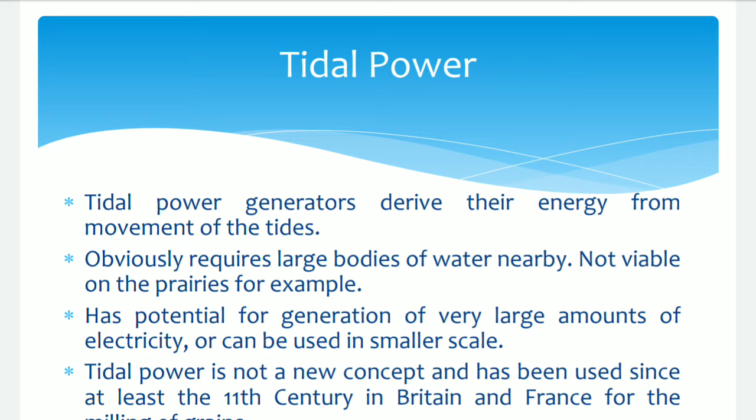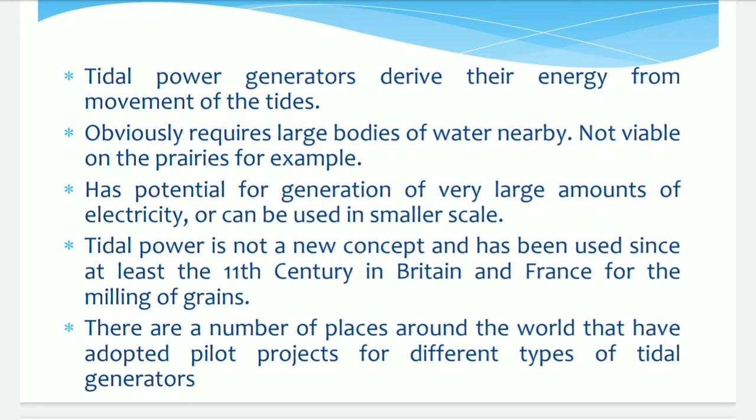Tidal power generators derive their energy from the movement of the tide. Obviously they require large bodies of water nearby, not viable on the prairies, for example. Has potential for generation of very large amounts of electricity or can be used on a smaller scale. Tidal power is not a new concept and has been used since at least the 11th century in Britain and France for the milling of grains. There are a number of places around the world that have adopted pilot projects for different types of tidal generator.

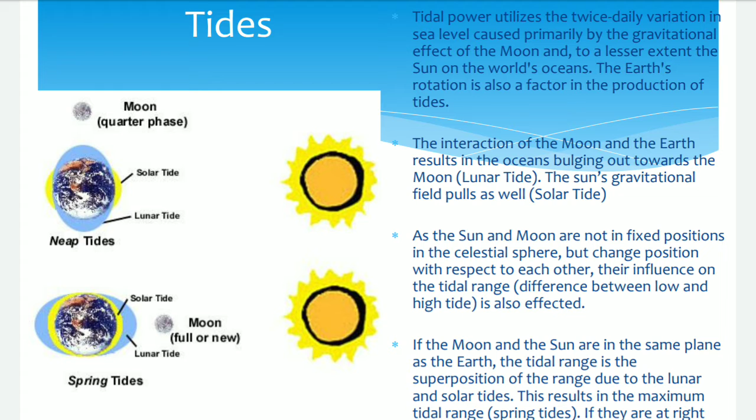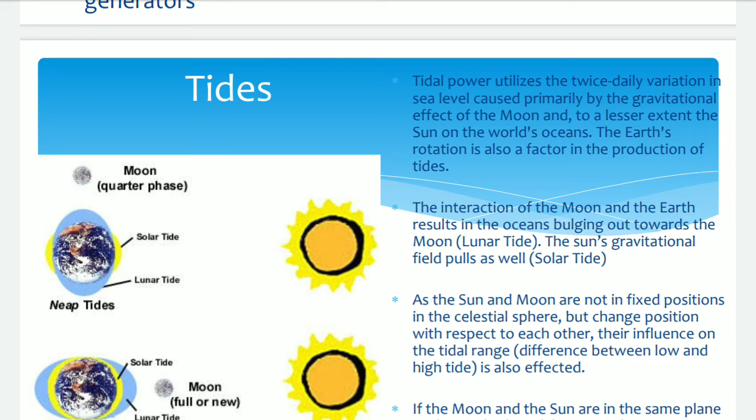Tidal power utilizes the twice daily variation in sea level caused primarily by the gravitational effect of the moon and, to a lesser extent, the sun on the world ocean. The earth's rotation is also a factor in the production of tides. The interaction of the moon and the earth results in the ocean bulging outward: the lunar tide. The sun's gravitational field pulls as well: the solar tide.

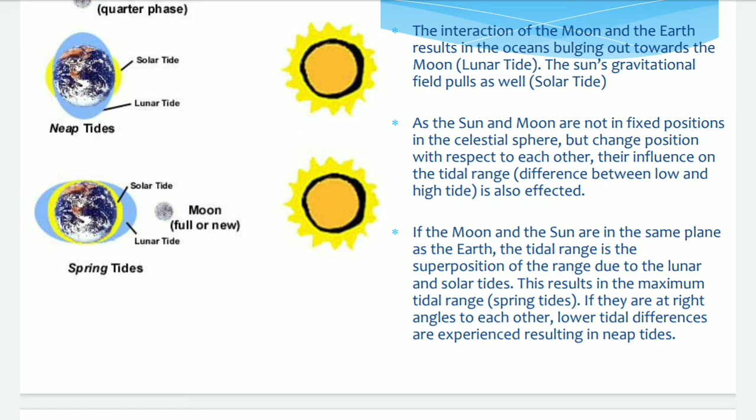As the sun and moon are not in fixed positions in the celestial sphere but change position with respect to each other, their influence on the tidal range, the difference between low and high tide, is also affected. If the moon and the sun are in the same plane as the earth, the tidal range is the superposition of the range due to the lunar and solar tides. This results in the maximum tidal range, spring tide. If they are at right angles to each other, lower tidal differences are experienced, resulting in neap tide.

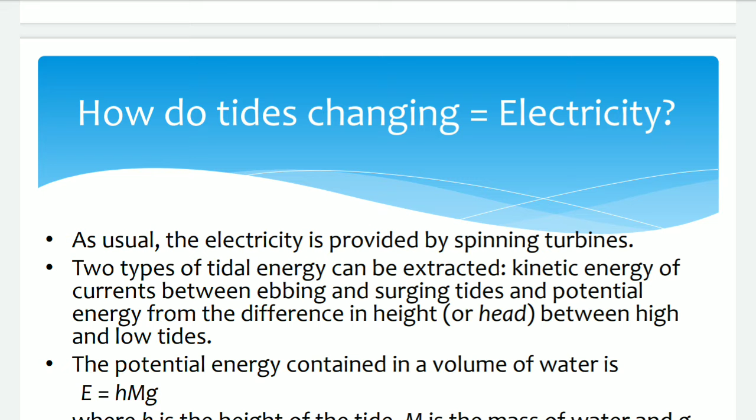Two types of tidal energy can be extracted: kinetic energy of currents between ebbing and surging tides, and potential energy from the difference in height between high tide and low tide. The potential energy contained in a volume of water is mgh, where h is the height of the tide, m is the mass of water, and g is the acceleration due to gravity. Therefore, tidal energy generators must be placed in locations with very high amplitude tides.

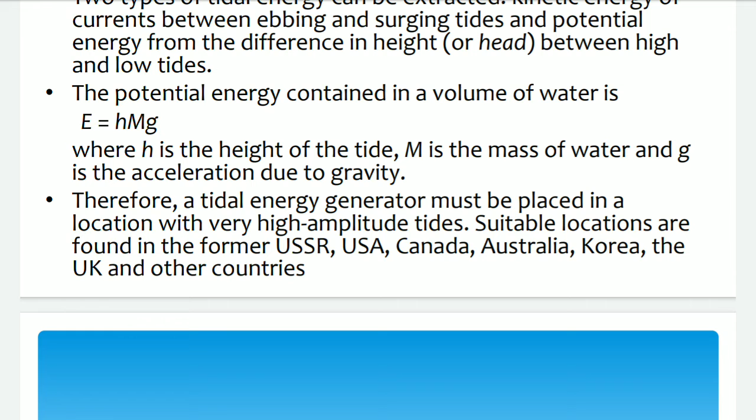Suitable locations are found in the former USSR, USA, Canada, Australia, Korea, the UK, and other countries. The generation of electricity from tides is very similar to hydroelectric generation, except that water is able to flow in both directions and this must be taken into account in the development of the generator.

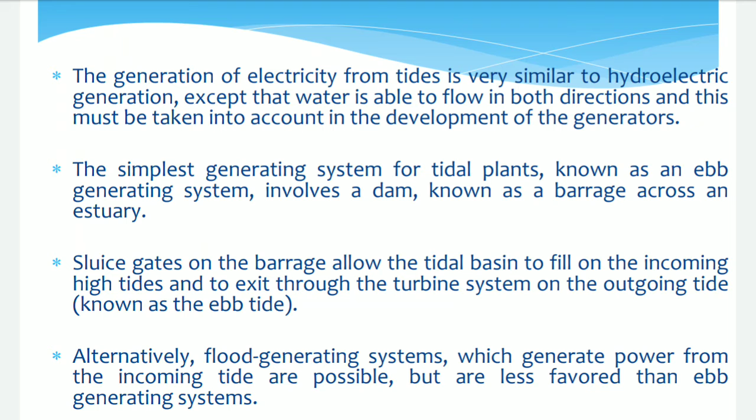The simplest generating system for tidal plants, known as an ebb generating system, involves a dam known as a barrage across an estuary. Sluice gates on the barrage allow the tidal basin to fill on the incoming high tide and to exit through the turbine system on the outgoing tide, known as the ebb tide.

Alternatively, flood generating systems which generate power from the incoming tide are possible but are less favored than ebb generating systems. Capturing tidal power, dams or barrages with gates are usually built across the mouth of the basin.

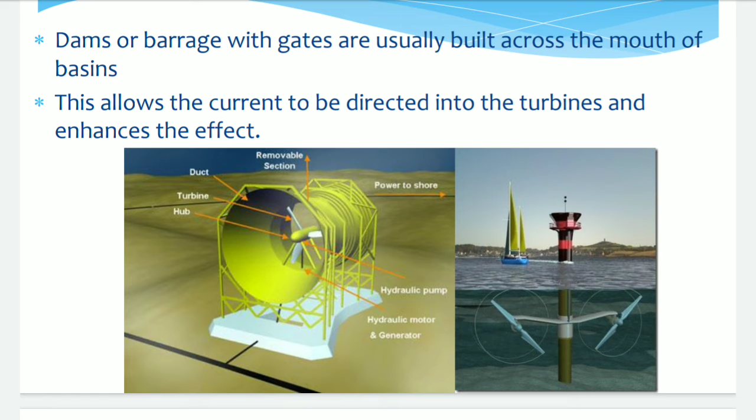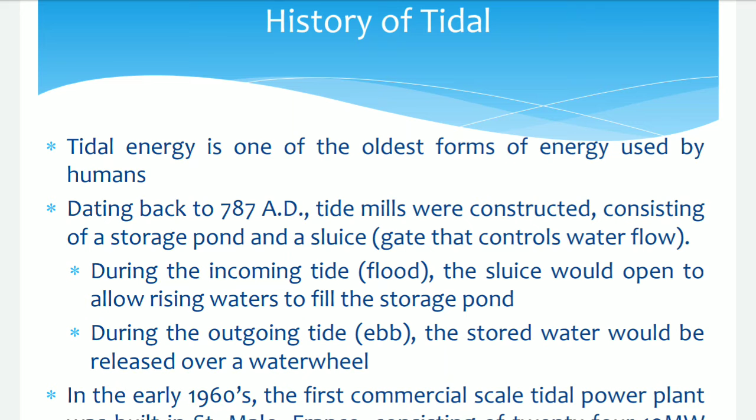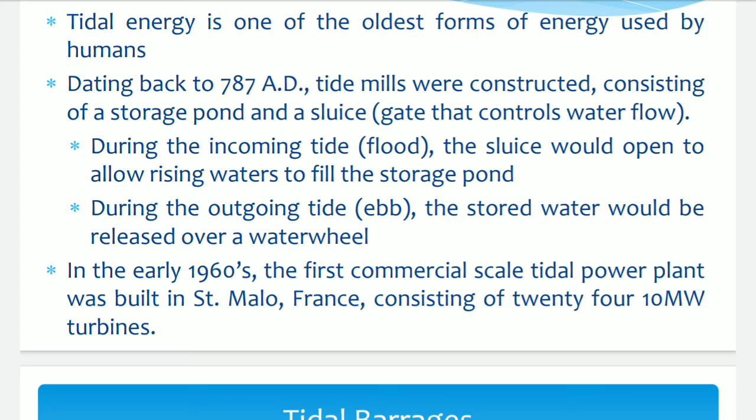History: tidal energy is one of the oldest forms of energy used by humans. Dating back to 787 AD, tide mills were constructed consisting of a storage pond and a sluice gate that controls water flow. During the incoming tide (flood), the sluice would open to allow rising water to fill the storage pond. During the outgoing tide (ebb), the stored water would be released over a water wheel.

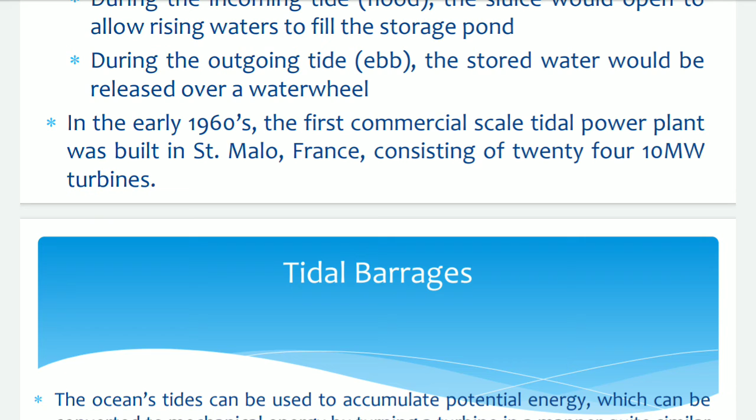In the early 1960s, the first commercial scale tidal power plant was built in Saint-Malo, France, consisting of 24 10 megawatt turbines. Tidal barrage. The ocean tides can be used to accumulate potential energy which can be converted to mechanical energy by turning a turbine in a manner which is similar to hydropower.

As the tide rises and falls daily, basins along the shoreline naturally fill and empty. A complete tidal cycle takes 12.5 hours, so there are 2 high tides and 2 low tides a day.

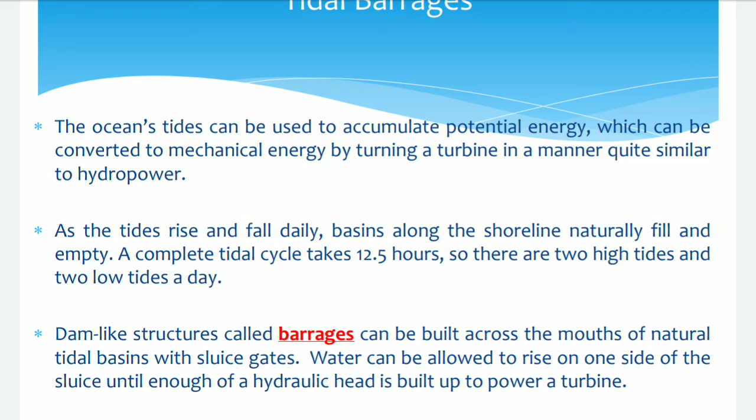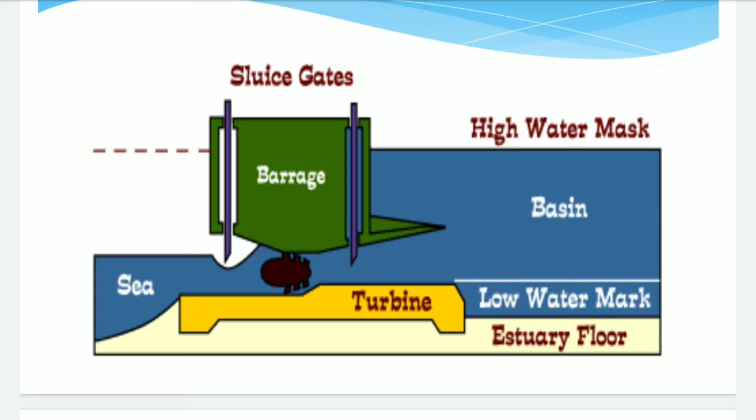Electricity generation works as the tide comes in and again when it goes out. The turbines are driven by the power of the sea in both directions.

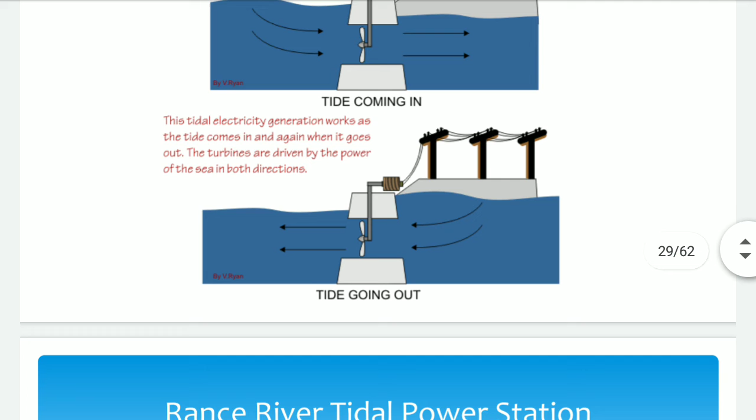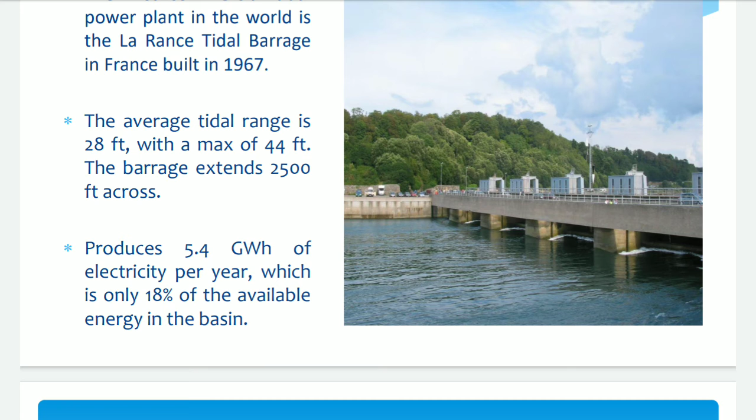The average tidal range is 28 feet with a maximum of 44 feet. The barrage extends 2500 feet across and produces 5.4 gigawatt hours of electricity per year, which is only 18% of the available energy in the basin.

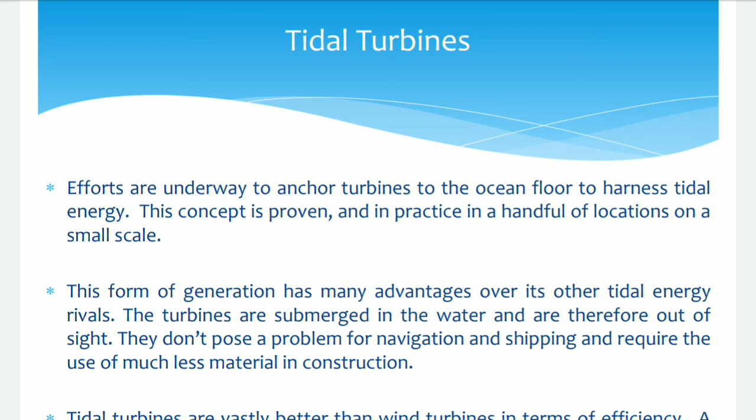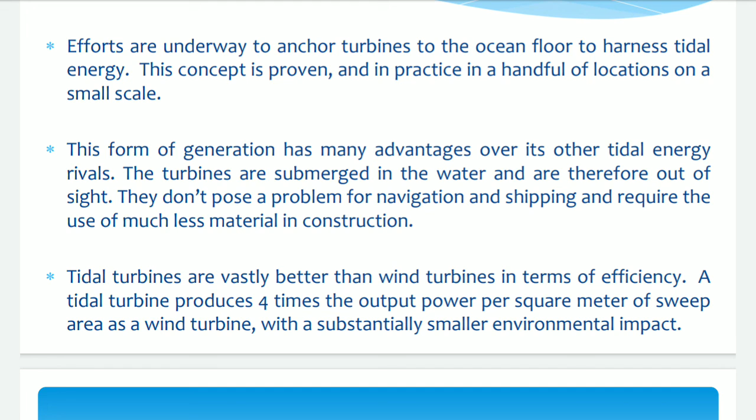What are tidal turbines like? Efforts are underway to anchor turbines to the ocean floor to harness tidal energy. This concept is proven and in practice in a handful of locations on a small scale. This form of generation has many advantages over its other tidal energy rivals. The turbines are submerged in the water and are therefore out of sight. They don't pose a problem for navigation and shipping and require the use of much less material in construction.

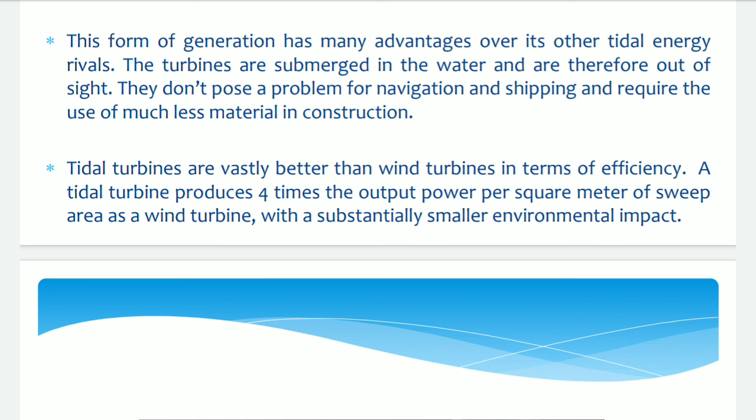Tidal turbines are vastly better than wind turbines in terms of efficiency. A tidal turbine produces 4 times the output power per square meter of swept area as a wind turbine, with a substantially smaller environmental impact.